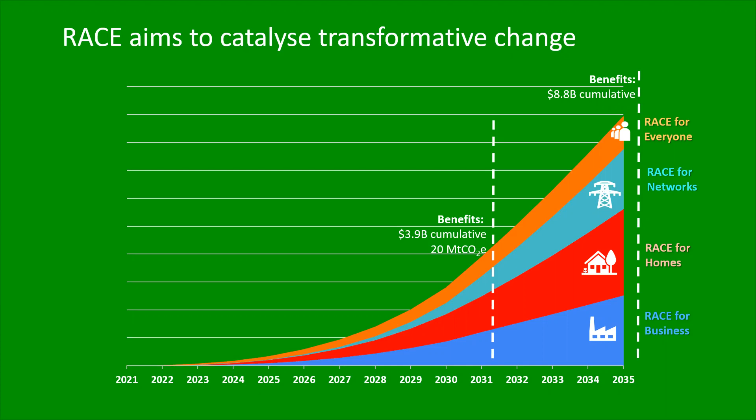There are 4 research programs in Race for 2030. This one was sponsored under Race for Business. We also have Race for Homes, Race for Networks, and Race for Everyone. Within Race for Business, there are 5 themes.

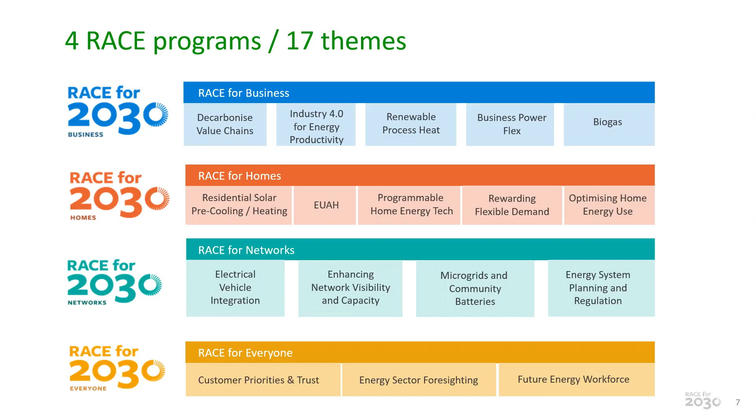So really what our CRC is all about is linking together everyone who has an interest in reducing greenhouse emissions cost effectively. That means we link between not just research organisations like UniSA, but also industry partners like Aldom in this instance, government like the Government of South Australia, but in various other projects in other themes, we also have network businesses and technology providers.

For Race for Business, as I previously said, there are 5 themes. This project was supported through theme 1, which is transforming energy productivity through value chains. For each of the 5 themes, an opportunity assessment was done in the early stages of the CRC. That was a very wide-ranging, comprehensive assessment of what the opportunities were for projects relating to these different themes. For the first theme, the food value chain was one of the sectors identified as having a lot of potential for transforming energy productivity by looking at the value chain. And that's how this project came about.

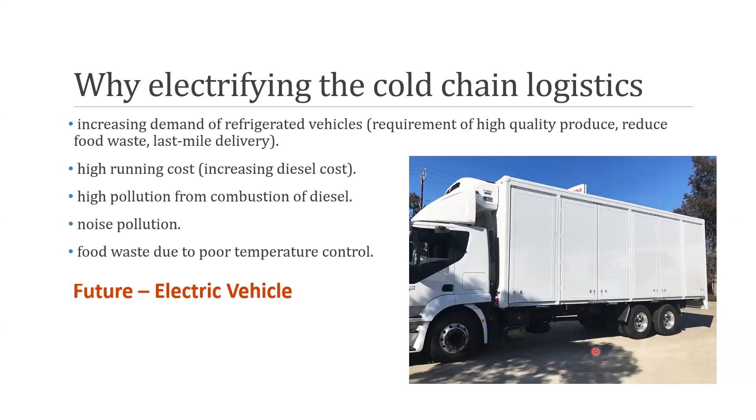Aldom joined Race for 2030 to design and build a body to enhance the PCM, phase changing material, also known as Eutectics, that will be created by UniSA and its partners to deliver perishables and frozen foods during the delivery process in perfect condition, with consistent and even distribution of thermal efficiency throughout the body, which is very important.

That's where they were getting a lot of the wastage, a lot of food not being delivered in the right state. The PCM system and refrigeration unit will ensure maintenance of temperature conditions to meet HACCP compliance.

The design of the body will have thermodynamic performance and provide multi-temperature zones for frozen, chilled, and ambient isothermal requirements. The weight of the body will be reduced as the refrigeration unit can be deleted from the truck's chassis.

With a remote refrigeration unit back at base, you can charge the PCM and enhance the driving range of the vehicle, not carrying around the excess weight.

Battery demand will become paramount, and using off-peak energy to charge the PCM system so we can take the pressure off the supply grid is a huge benefit. We can realistically and consistently deliver foodstuffs to meet manufacturers' and processors' expectations and requirements.

Some of the refrigeration weights I'd like to mention: on smaller trucks they can weigh up to 200 to 250 kilos, and on larger trucks those weights can be up to 450 kilos or more for the diesel electric units.

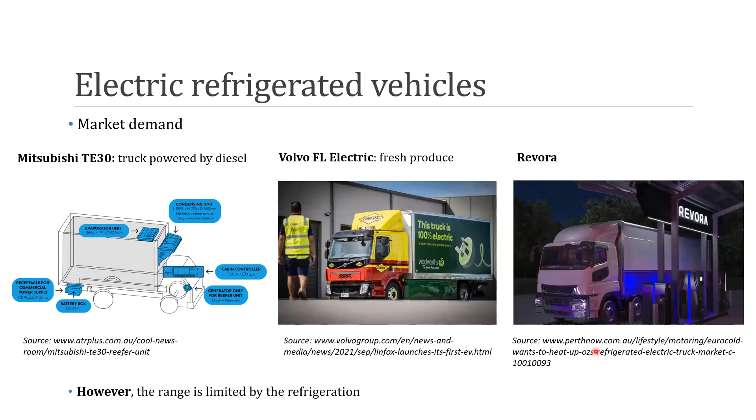Okay, so I'll be presenting next, and I'm just giving a project overview. So I'll be talking about why we are looking at refrigeration in refrigerated transport. What are the problems? What solutions are other people providing? What's our solution, and what work are we working on?

You can find them in the actual report. The report is available on the Race for 2030 website, so you'll be able to read up on all the work we're presenting today, as well as look at all the references where all our figures come from.

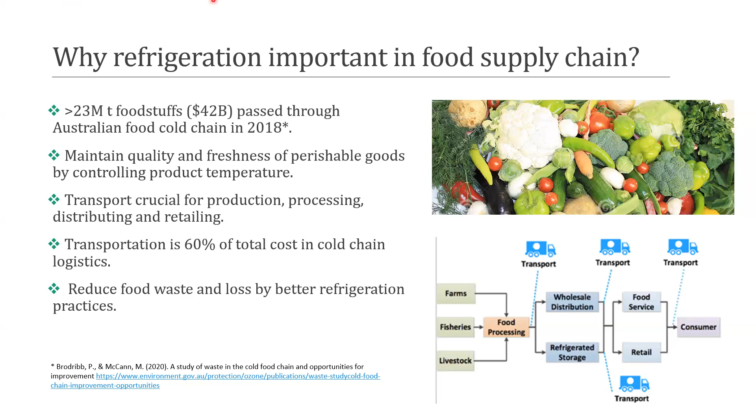But refrigeration, as Mark pointed out, is important to maintain quality and freshness of perishable goods. And obviously transport's crucial for the production, processing, distributing, and retailing. Transport represents 60% of the total cost in cold chain logistics. And yes, obviously we have to reduce food waste and loss with better refrigeration practices.

The conventional refrigeration system in transport is similar to the household refrigerator in terms of components—it has the evaporator, condenser, compressor, expansion valve. That component is all the same. However, what drives the compressor is not an electric motor, but a diesel-powered internal combustion engine. That's conventionally what drives the refrigeration system.

The diesel engine—a lot of that energy goes out as heat to ambient, so we waste a lot of energy, and only a small amount goes as kinetic energy into the compressor. So overall, the efficiency is reduced and not as high as it could be when using a diesel engine.

The typical COPs, that's coefficient of performance, or the amount of cooling we get divided by the energy input—with a lot of the systems on the road, it's around 0.5 when refrigerating at minus 20 degrees, meaning half of that electrical energy is being generated as cooling. With newer systems, that might be approaching 1, so a 1-to-1 ratio. And if we're cooling around the 0 to 4 degree mark, we probably have a coefficient of performance of 1.5. Having an electric motor would increase those figures significantly.

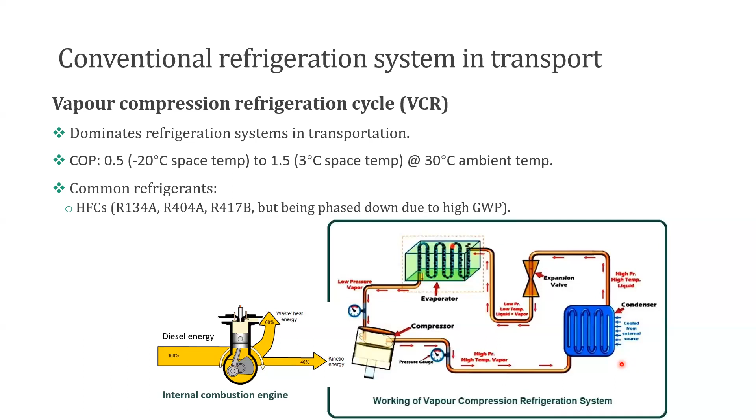Some facts about diesel-driven refrigeration in transport: well, they use around 1.8 to 6 litres per hour. A lot of the diesel trucks actually have their own diesel engine driving the refrigeration system, as well as another diesel engine driving the truck. And then there are also ones that take some of the energy from the truck's diesel engine to power the refrigeration system.

So there's two types, but they use around 1.8 to 6 litres per hour, and it represents around 5% of the total diesel energy consumption in Australia, which is around 70 to 90 million litres a year. If we look at what that equates to in cost, at $2 a litre, that's around 140 to 180 million dollars per year. And as far as emissions are concerned, that's 189 to 243 kilotons of CO2 equivalent Scope 1 emissions.

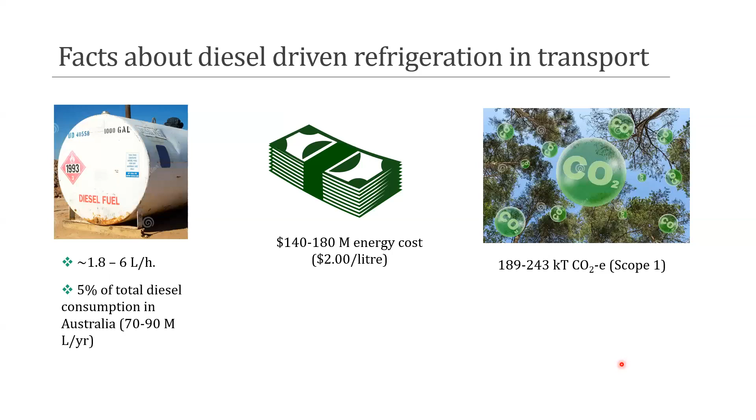So all these figures are presented in the report, and the references and how we arrived at these figures is all explained.

Now I'll be talking about some of the types of refrigeration systems out there for vehicles. The first one is cryogenic refrigeration, which uses either liquid nitrogen or liquid carbon dioxide as the energy source.

When the liquid gas turns into a gas, during that process it actually creates cooling. So if you've got the liquid gas on the vehicle, you're just expanding the gas, and so you've got the capability of rapid pull down of temperature, very low noise, low energy consumption on the vehicle, and low environmental impact. However, first of all, these systems are very expensive. And second, we have to actually create the liquefied gas, so we need a lot of energy for that, and there's also a cost involved. Overall, there's a high cost of these systems, and the market penetration is about 1%.

You can also get liquefied natural gas versions of these systems. So you still have a liquefied gas, but because you're using natural gas, once it's expanded, it actually goes into the engine to drive the vehicle. So those sorts of systems, and a handful of those systems are also driving on the road.

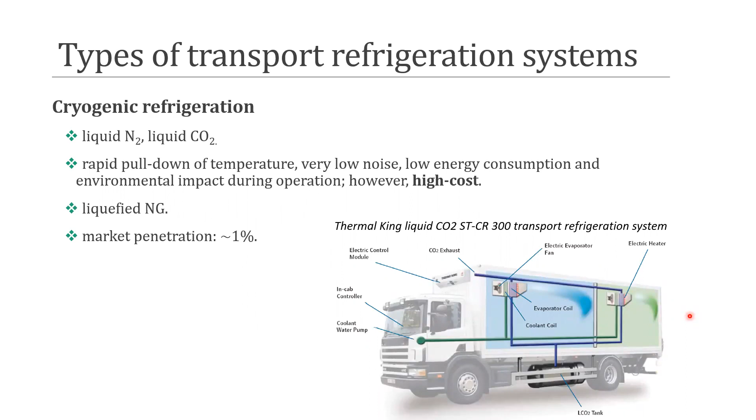Now, eutectic refrigeration systems are systems that use phase change material, which is like an ice, but a phase change material. You can tailor the storage temperature to any temperature by using certain chemicals and ratios of chemicals.

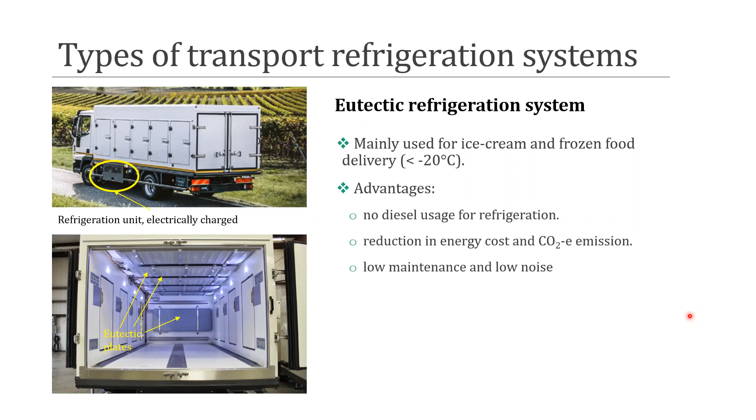So there's a refrigeration system here that's electric driven, and you charge it by connecting it to the grid. That's the idea of this sort of system.

So the shortcomings of that system, which has been developed and hasn't changed over the last 25 years: the design, those plates, are extremely heavy. There's a lot of scope to make those much lighter, which is important for electric vehicles. Also, the way this system cools on the vehicle uses what's known as passive cooling, which means the control of the heat transfer is very poor. The temperature inside is not uniform, so there's poor quality temperature control.

Also, the compatibility of the salts used in this case with the containment material is probably the wrong choice. You can see there's corrosion, problems with the corrosion, and there is no local supplier in Australia.

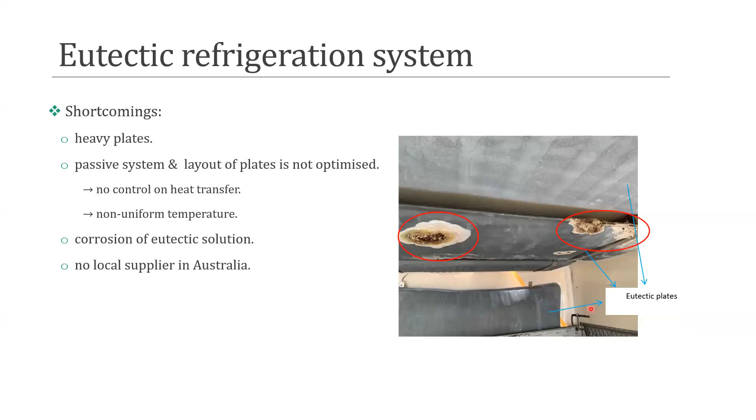Now, I'm not going to go through these in detail, but there are a lot of types of systems that are being trialled or developed, or a small handful on the road.

So there are electric-driven refrigeration systems that have been trialled. Then there's also one with a battery that is charged whenever the truck is braking—whenever the truck's braking, the kinetic energy in the wheels is basically converted to electrical energy, and that provides the energy to the refrigeration system. There is a hydrogen fuel cell powered vehicle and refrigeration system on trial on the road, and then there are small vans that use either the electric battery or the alternator of the diesel powered vehicle.

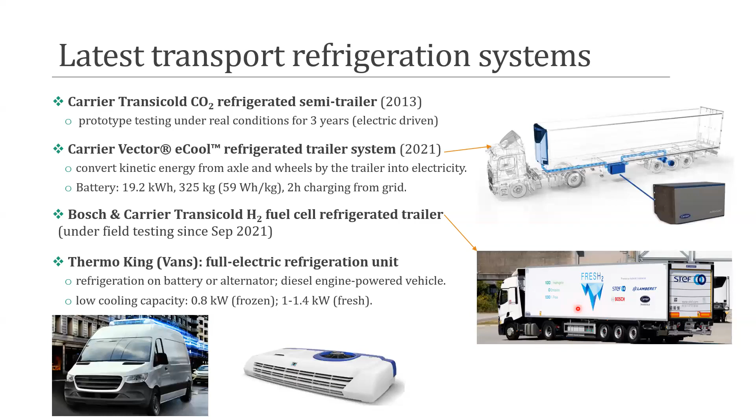So there are some vehicles that have been trialled and developed. We've explained more of these in the report.

Now, as I mentioned previously, we also need to think about refrigerants, because the refrigerants used at the moment have high global warming potential. R452 is being considered to replace R404A.

However, the global warming potential is still over 2,000. So to me, that's not the ultimate solution. We maybe should be thinking about natural refrigerants.

R290, which is propane, typically used for a barbecue. The global warming potential is 3, and there are already several refrigeration systems for refrigerators using R290, as well as air conditioning systems, which will be used over the next 5 to 10 years.

Then there's also R744, which is carbon dioxide. Its global warming potential is 1, so there is scope to use a more environmentally friendly refrigerant in any new system being developed.

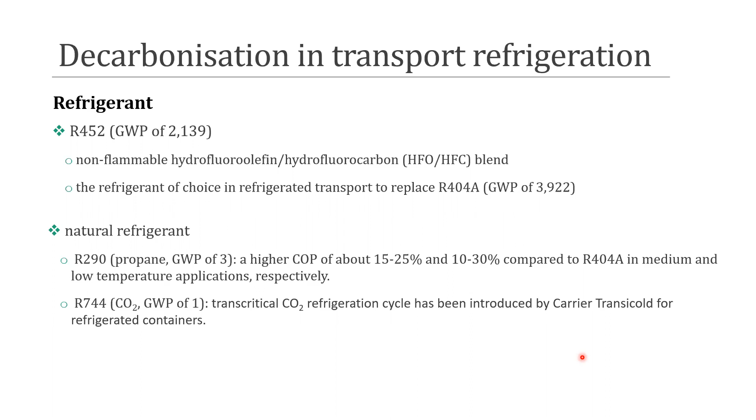This slide shows the work packages in this phase 1 project of our long-term project. The University and Aldom did a techno-economic analysis, which will be presented by Ming later in another presentation. We had Sahela particularly working on computer modelling of the different concepts of eutectic refrigeration systems.

We had Peter Pudney working alongside Simble and the South Australian government on the charging pattern control system. And Aldom particularly have been looking at the truck body and how lightweight materials can be used to help decarbonise the refrigerated transport sector.

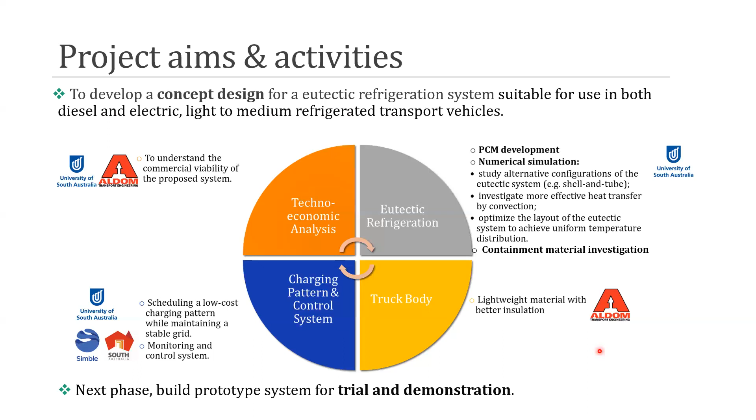So the whole purpose of this project is to come up with a concept design, and the next project, which is about to commence, will be looking at building a prototype and trialling it.

Some of the work that we did in this first phase is that we tried to develop some new phase change materials that are specifically tailored for the refrigerated transport sector. Some of the results are presented in the report.

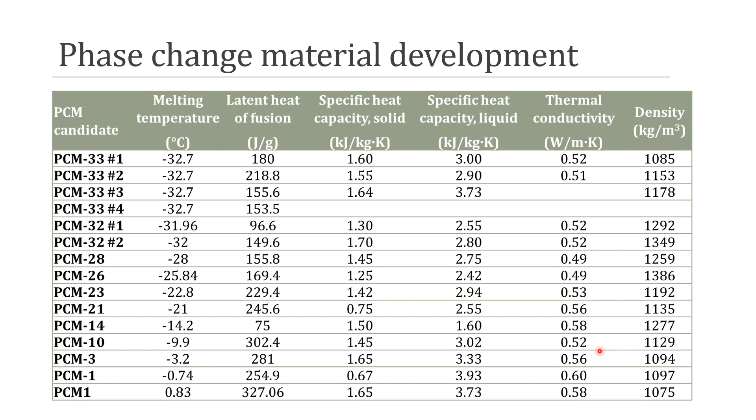This last slide here really just shows that we focused on developing the phase change materials for cold temperatures at -18 degrees, as well as refrigeration temperatures between 0 and 4 degrees. And so that concludes my presentation.

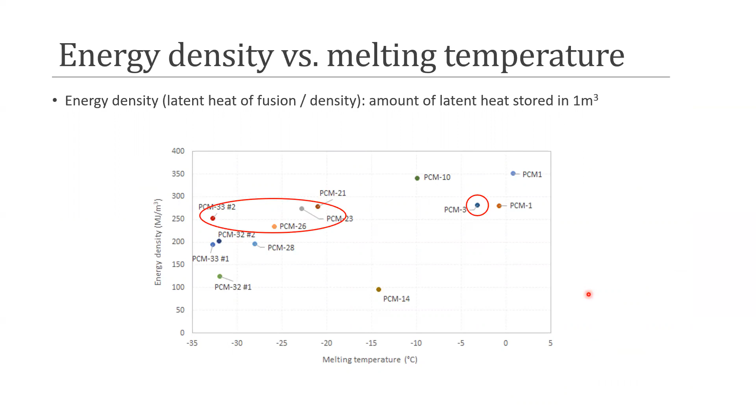So next we'll now go over to Ming, who will talk about the techno-economic analysis. Hello, everyone. My name is Ming Liu. I'm a research fellow at the University of South Australia.

In this tech economic analysis, we have compared and evaluated 4 types of transport refrigeration systems. The first one is the diesel-powered vapor compression refrigeration, as Frank talked about in the beginning of his presentation. This is the most common technology on the market. The second one is the battery-powered vapor compression refrigeration.

The third and fourth are the eutectic refrigeration system, which employs the phase change material. In the commercial system, the phase change material, the PCM, is encapsulated in flat plates, and those plates are mounted underneath the roof and in the front of the refrigerated space.

In this project, we're looking at a different design, which means all the PCM is encapsulated in one box, and we located this box in the front of the refrigerated space. This design is supposed to have a better and more controllable temperature management.

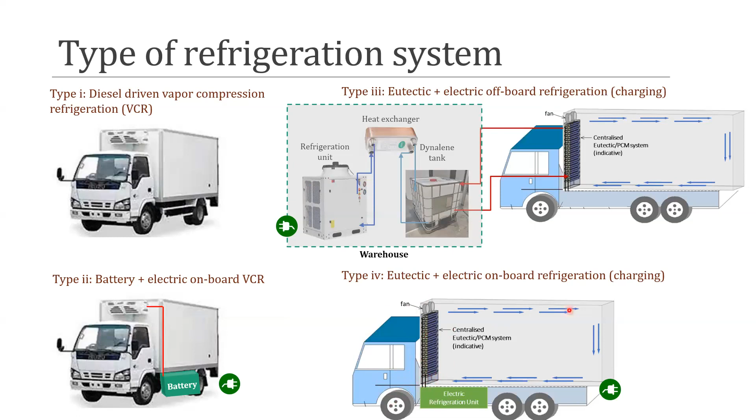All the refrigeration systems are sized for a medium 2-compartment refrigerated vehicle. This type of vehicle was suggested by Aldom to target supermarket customers, and the vehicle can be used for delivering fresh and frozen food in Adelaide climate conditions.

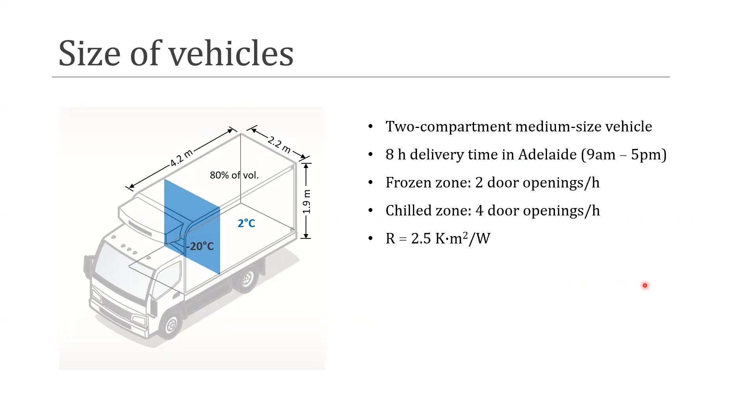This table has the assumptions and the estimated values used in the analysis, including the COP, the cost, the weight of the refrigeration unit, and the cost and property of the battery, and the property and cost of the PCM, also the cost of diesel and electricity. So I'm not going to go through every number here.

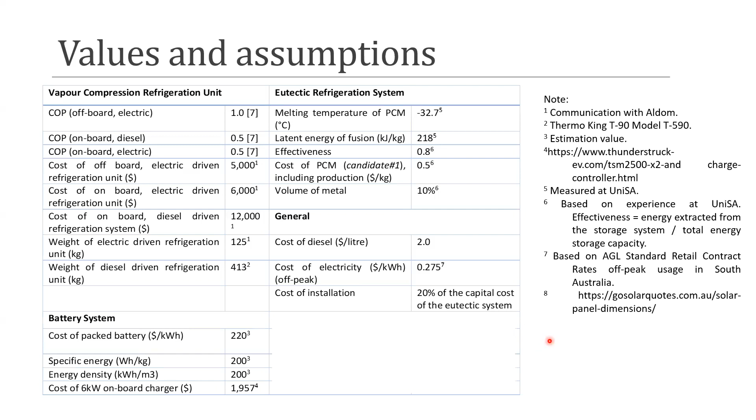If you are interested in any specific assumption, we can come back later on. So now let's have a look at the refrigeration load for this truck. The peak load is 2,680 watt. And for this size of vehicle, Thermo King recommend to use its T590 diesel-powered refrigeration unit, which has a weight of 413 kilograms, and this is a specification for the unit.

To size both the battery and the eutectic refrigeration system, we need to know the daily refrigeration energy before the next charging. So therefore, an hour-by-hour load calculation has been conducted. And the daily energy is 20.2 kilowatt hour. For the diesel powered system, it will consume 10.9 liters of diesel.

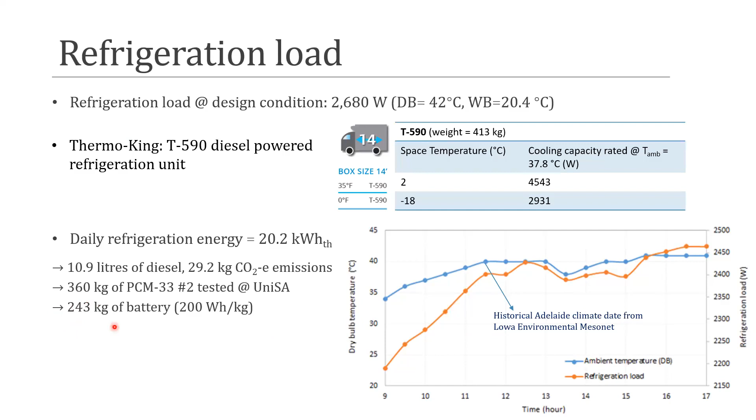To provide the same amount of energy, it needs 360 kilograms of PCM or 243 kilograms of battery. This is the analysis result. So we have calculated the capital cost of the refrigeration system, the operating cost per day, the cost of ownership over 10 years, and the weight of the system on the vehicle, and also the CO2 emission.

So due to the high cost of battery, the battery powered system is the most expensive one. And the eutectic system is the cheapest, which is the current case. So the commercial product of the eutectic refrigerated truck, it is cheaper than the diesel truck.

And for the cost of energy per day, I only considered the cost of the diesel and the electricity. There are some other costs, for example, the maintenance, the repair, also insurance and personal training. I didn't include that, but different systems will have different values.

So if we look at the cost of ownership, the eutectic system is the lowest, below 20,000 over 10 years. And the battery powered system, even though the capital cost is high, the operating cost is very low compared to the diesel system. So therefore, over 10 years, it is cheaper than the diesel powered refrigeration.

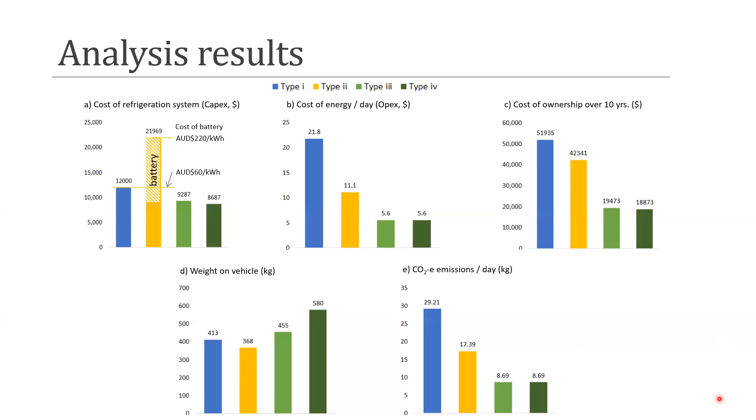The next few slides present the result from some key parameter analysis. The first one is the insulation R value. We have varied the value from 2 to 20. The graph on top presents the impact of the R value on the total refrigeration energy and the refrigeration load. The bottom graph presents the impact of the R value on the weight of the battery system and the eutectic system. So you could see that the battery powered refrigeration, which is this grey line, is...

the lowest in most of the studied cases. But the eutectic system, type 3 system, when the R value increases, the weight reduces a lot, and at the end, it is comparable with the battery powered system.

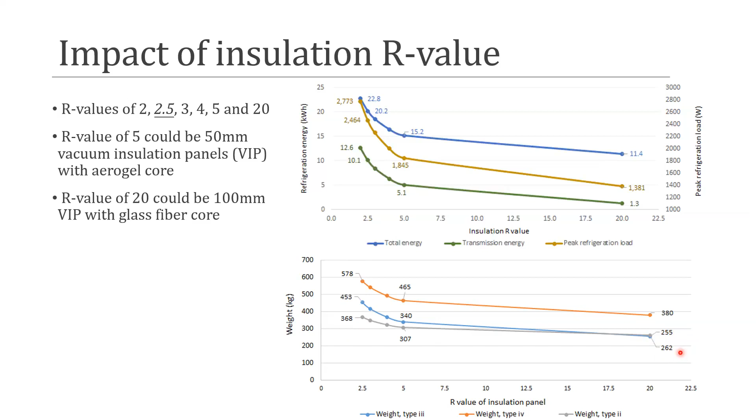And the second parameter we have looked at is the specific energy of battery. There are different types of battery as shown in the table. As it is well known, lithium-ion battery dominates the market. And based on this value range, we have selected 4 specific energies, which is low, medium, high, and very high.

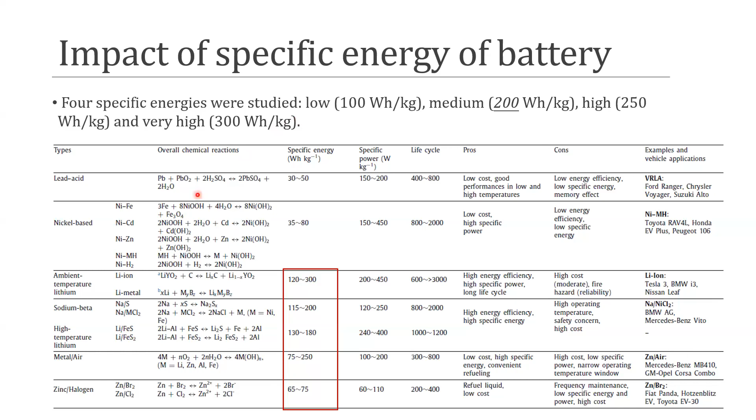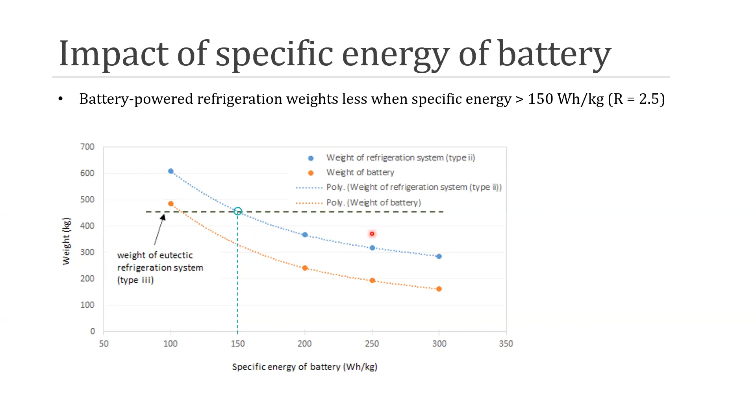And this graph shows the weight of the eutectic refrigeration system, which is the horizontal line, and the weight of the battery-powered refrigeration system, which is this blue line. And it is found that when the specific energy of battery is greater than 150 watt-hour per kilogram, the battery-powered refrigeration system will be lighter than the eutectic refrigeration system.

Another parameter we have looked at is the cost of the battery. So the cost of the battery has fallen significantly over the last decade. And until 2021, it is the lowest at $141 per kilowatt hour. At 2022, the price slightly increased, and now it is stabilized. It is predicted that the battery price will drop again from 2022.

And even though in the future the cost of the battery can drop to $70 per kilowatt hour, which is less than half of the current price, the cost of the battery powered system will still be more expensive than the eutectic system.

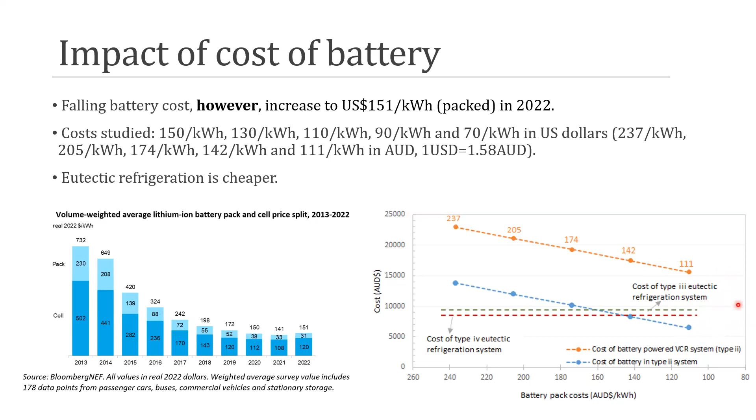In conclusion, the eutectic refrigeration systems have the lowest capital cost, operating cost, energy consumption, and CO2 emissions. The battery-powered system is still the most expensive one, considering the future price drop.

When the specific energy of the battery is greater than 150 watt-hour per kilogram, the battery-powered refrigeration system has the benefit of adding less weight to the vehicle compared to the eutectic refrigeration. This energy density is very achievable with modern batteries.

The improved insulation will result in a smaller and lighter refrigeration system. The difference in weight between the battery system and the eutectic refrigeration system becomes smaller with increasing R-value of the insulation material.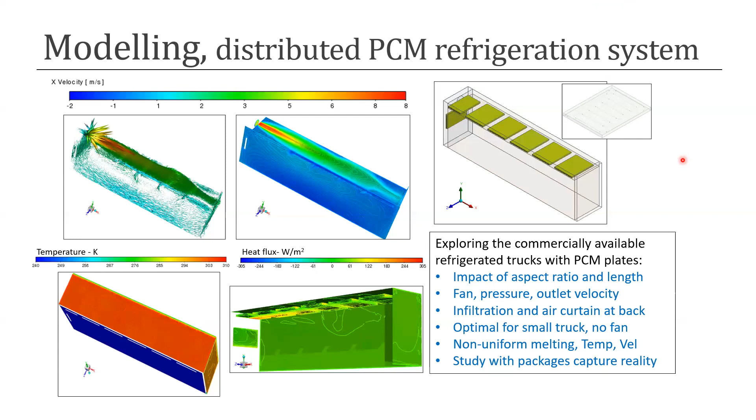Looking at the commercially available system advantages and disadvantages, we thought about a few alternative concept designs. Most of them are like centralized system, which have advantages compared to the distributed system.

It's easier to access, since it's in one location. So everything from the maintenance point of view, or if you want to swap them, is much easier, and you have access to that site. With this sort of fan, it's required no matter the length, because it's in one location and you need a good fan with optimum velocity, outlet velocity and pressure to bring the heat transfer to cover the whole area of the container.

So here we're comparing the centralized system with the distributed system. Similarities are that the aspect ratio and the length, the fan location, velocity and pressure are important. The air curtain at the back is important, and also the inclusion of the packages and pallets. But an important difference is that we have another important parameter we can play with.

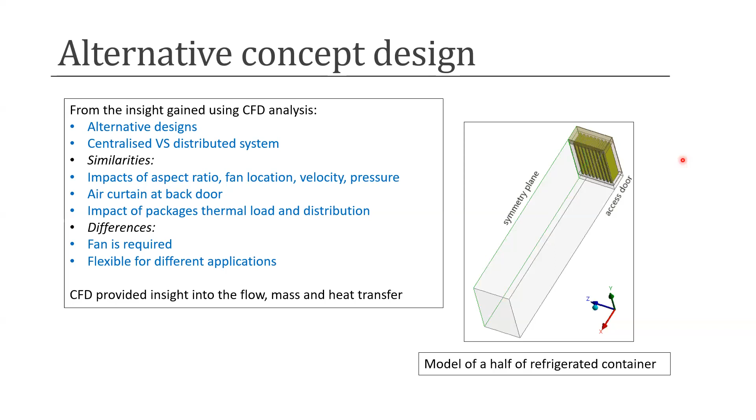So, okay, from this analysis, we used CFD, comparing those advantages and disadvantages. We came to select one concept design that we did more modeling, further modeling, to understand the mass flow and heat transfer. Here is the result of the modeling that we did for the selected concept design.

So that's the strength of the CFD modeling, because you put a fan in a location with a specific outlet velocity and pressure, and you can see if it provides good air distribution, specifically at the back when the doors are open - is there good coverage there as a barrier or not. Then you can change those parameters to get the best coverage that is desirable.

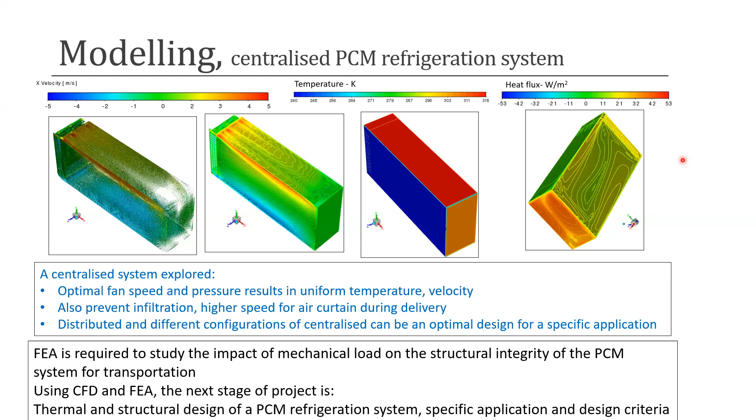We took a fairly broad view of the problem. How you best charge your cooling system depends a lot on the type of trucks you have, the pattern of use they have, when they're available for charging, and also the type of cooling system you've got, whether it's a battery electric system or a eutectic system. It also depends a lot on the availability of electricity, how much capacity you've got to recharge, and the tariffs you're paying.

So the kind of issues we identified were that if you've got a cooling system on the truck that's powered by batteries on the truck, then you can use the same sort of AC charging that's used for electric cars. That's very inexpensive and can be installed at depots and destinations, but charging is fairly slow. DC charging is a lot quicker, but it requires expensive dedicated chargers. Battery swap is also very fast, but it requires standardized batteries and handling equipment, and you have to have more batteries than you've got trucks so that you can be charging some while your trucks are out on the road.

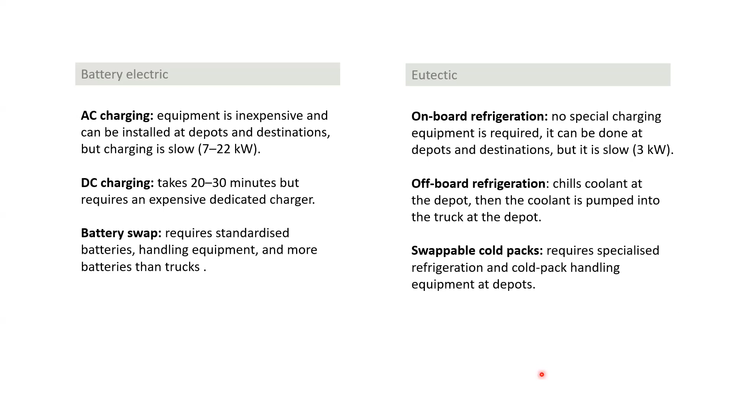For the eutectic systems, if you've got onboard refrigeration, you don't need any special charging equipment. It can be done at depots and destinations, but it's fairly slow. If you're running off-board refrigeration, where you cool a fluid that you then pump through the truck when it arrives back, that can be fairly slow, but you can pre-chill some of the cooling fluid. Swappable cold packs are fairly fast to change, but require specialist handling equipment at the depots.

So the cost issues are that there are many different tariffs around at the moment - about 100 different tariffs available in the Australian market. Flat tariffs, where you pay a single rate for electricity, really don't give you much incentive to schedule your charging, but these sorts of flat tariffs are becoming less common now.

You might get a tariff that varies with time of use, so you get cheaper prices during the middle of the day, particularly in South Australia, or overnight. They're fairly predictable. Real-time pricing gives you access to the wholesale energy market where the price changes every 5 minutes, which is more difficult to predict but can give significant savings. Critical peak pricing occurs when you get alerted in advance that there's going to be times where the price is very high, and you need to work around those.

Many businesses have demand charging that depends on the greatest amount of demand they put on the grid during the month or even during the year. They're a bit tricky to work with, but you can work with those. You may also have demand management incentives where you're paid to reduce your demand during periods of high demand on the grid.

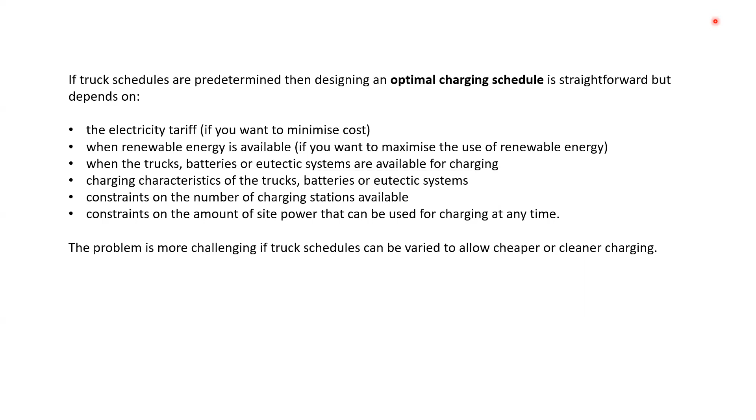You typically have fewer charging stations than trucks, so you need to schedule those through, and you may have constraints on the amount of power you've got on site to simultaneously charge several trucks. These are all problems that are very specific to the type of operation you're running, and also the type of cooling system you've got in your truck. We will be looking in detail at specific situations in the next phase of the project. The problem gets even more challenging if you're prepared to vary the way you run your truck schedules in order to get access to cheaper or cleaner charging. I think I'll leave it at that.